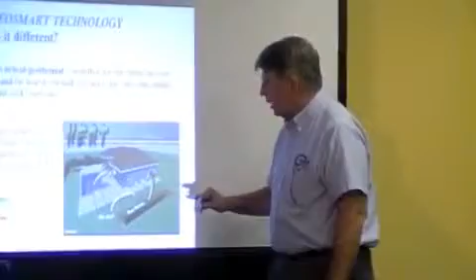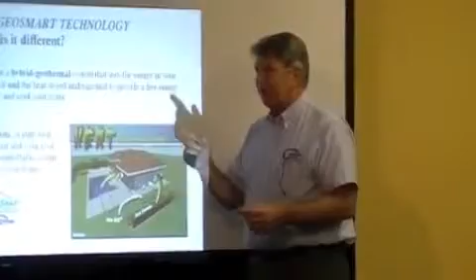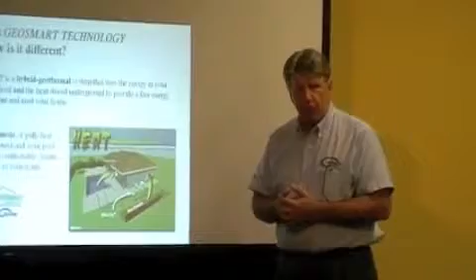So as you can see here, the GeoSmart system really is a hybrid, and we call it a hybrid because we have 2 panels in the ground, or 3 panels, or however many we need. The ground right here in this Northern California region is 67, 68 degrees year-round. So depending on the season and when you're heating, the fluid that we're pumping through that has a pretty good temperature differential, and that really lends itself to the operation of the geothermal heat pump. And Jason will talk about that a little bit more.

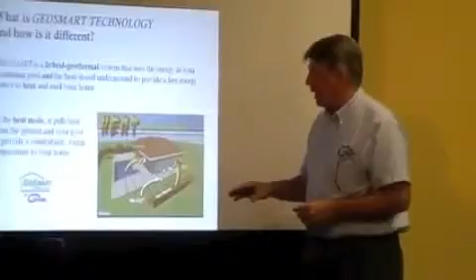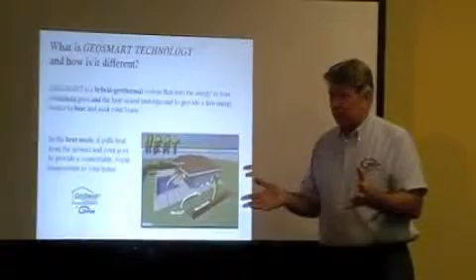But when we're heating the house, we're basically going to try to take heat out of the pool and out of the ground. And what we're finding is that as we take the heat out of the pool, it's transferring heat up through the shell really well, so it's maintaining that warm temperature. Now, when we get down into the freezing temperatures, with a cover on top of this surface, yeah, the temperature is not going to be 50 like it normally is, or 49. It's going to be 46 or 47. But that is still a lot of heat to heat your house sufficiently.

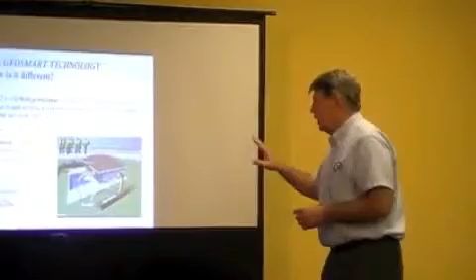So with the pool and the panels drawing heat out of the ground, we're finding that the system we've got adjusted just perfect for this region, having 1 panel per 3 tons. So in the heating mode, it's working beautifully. In the cooling mode, we're getting the same kind of conditions in taking the heat out of the house. We're dispersing heat into the pool as well as into the ground.

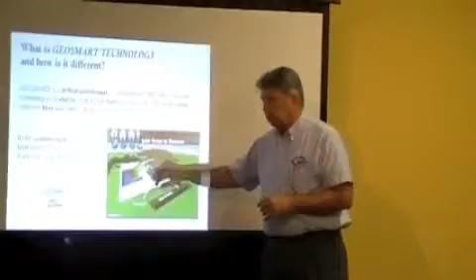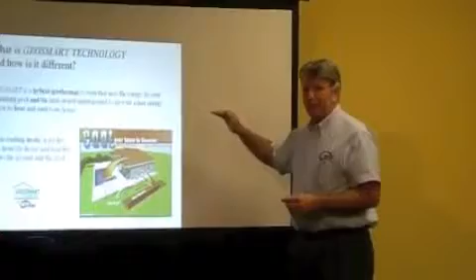So what does that do, though? In the Sacramento region, we have some pretty hot days. We're raising that pool temperature up a fair amount. But even during our hottest days, the evening is in the 70-degree range. So our challenge there is just to continue to lower that pool temperature down to an acceptable level.

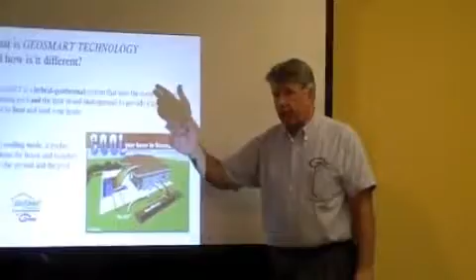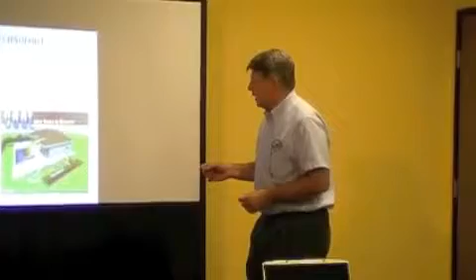And by simply circulating at night, we have water features, solar panels that are acting as radiators out there that we're running tests on. We're able to get that pool down very easily to allow the next day's absorption of the 3 to 4 degrees that we're actually pumping into the pool on a day-to-day basis. So the simplicity of the system, it just kind of boggles the mind, really. There is not much else to what we're doing.